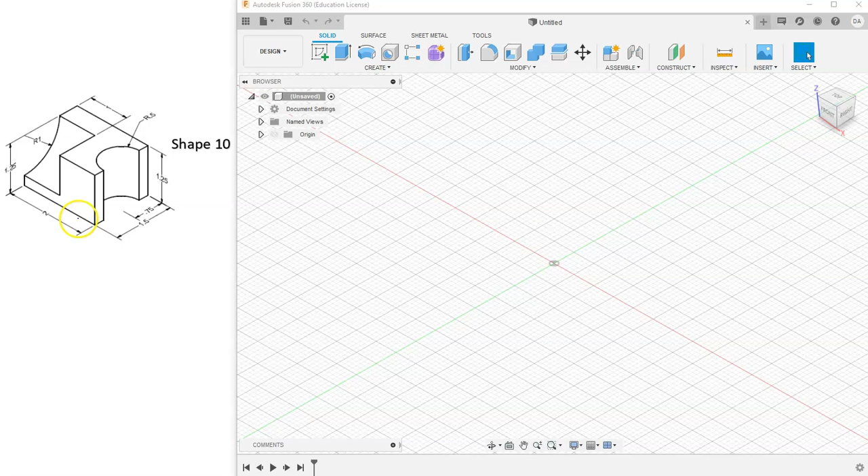And so let's start by just building a big rectangular prism. I'm going to create a new sketch, go to my front view, and this rectangular prism has a width of 2 inches and a height of 1.25 inches.

I'm going to grab my rectangle tool, click on my origin and drag, and type in my height first, 1.25. Then I'll hit tab on my keyboard and type in a width of 2 inches and hit enter, and I have a fully constrained rectangle.

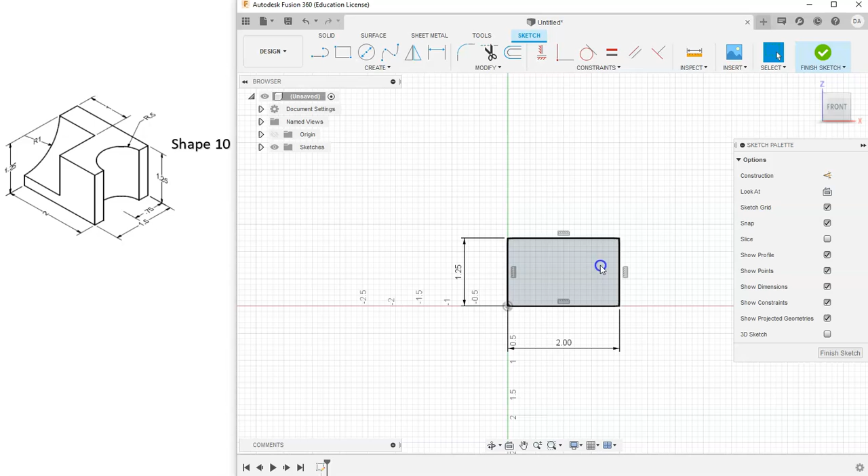I'm going to go to finish sketch and hit extrude, and I want this to extrude a depth of 1.5 inches. So let's type that in, 1.5, hit OK.

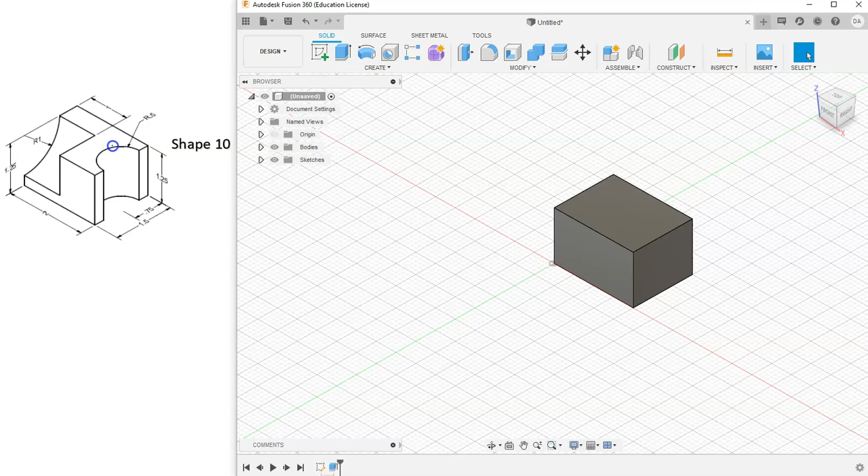And then we just need to cut out these two semicircles. So let's start with this half circle on this top face. I'll select my top face and go to new sketch, and let me zoom in so I can see what I'm doing. I'm going to start with my circle tool.

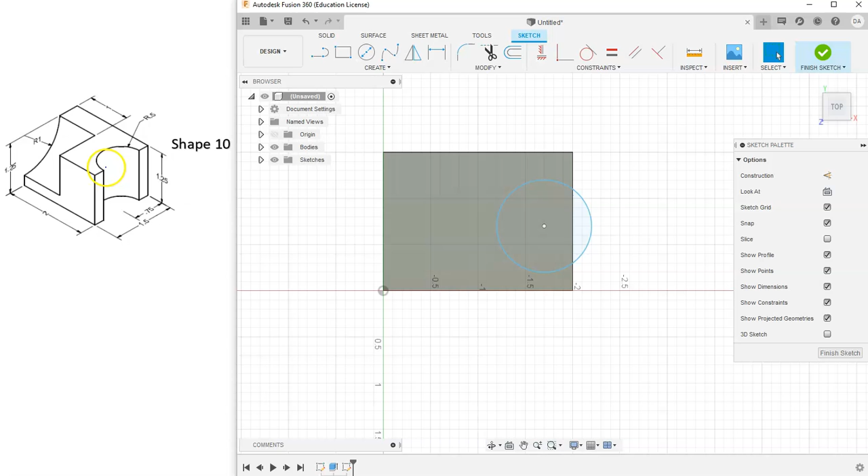I'm just going to draw a circle somewhere towards the right side of this shape. Right click and hit OK. Now this circle is centered on this edge, so we're going to take our coincident constraint and tell the center of our circle to be centered along this edge. Right click OK. So now this circle is stuck on this edge.

It can't move left or right, but I can move it up and down, and I can also change the size of this. I want to go to my home view so we can get a better look at this. And so we need to figure out those two dimensions. If I grab my dimension tool and select my circle, it'll give me a diameter of this circle.

If we grab our trim tool and we trim off this half of the circle that's sticking outside of our edge, now we only have a half circle.

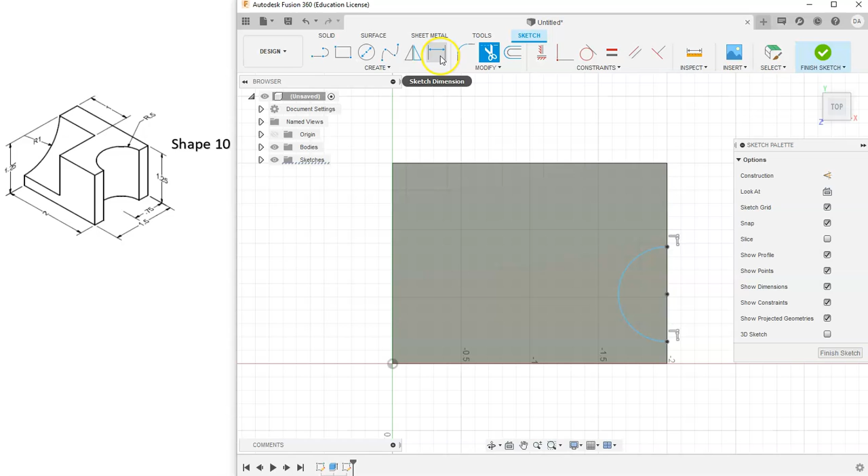Now if I grab my dimension tool and select this half circle, it'll automatically give me a radius. It no longer gives me a diameter for dimension. Whenever you dimension a half circle, it automatically measures the radius. Whenever you dimension a full circle, it automatically measures the diameter.

And what is our radius? Well, it's 0.5. Hit enter, right click, cancel, and now I can drag this half circle up and down.

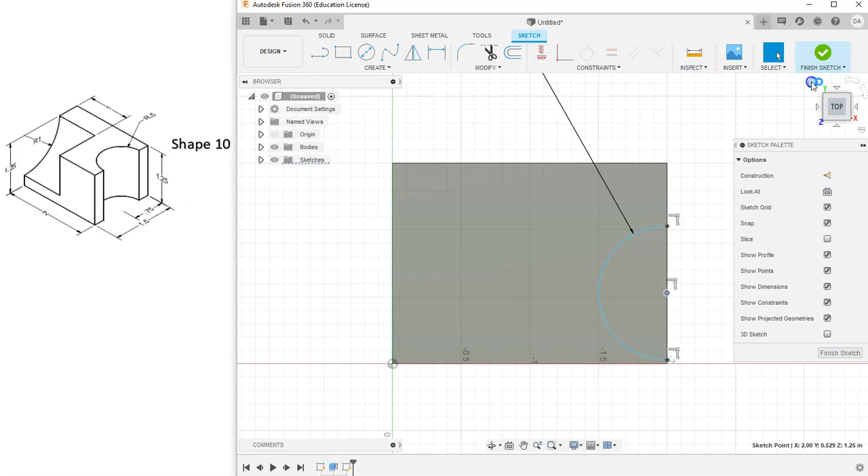What else do we know about this semicircle? Well, we know that the center of this semicircle is 0.75 away from this edge. So let's grab our dimension tool again. Let's click on the center of our semicircle to this edge over here, drag that out, and tell that to be 0.75, and hit OK.

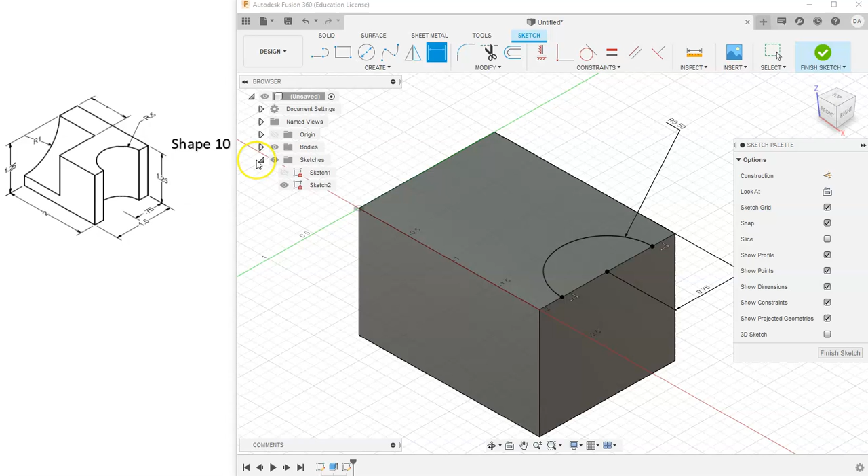And now we have a fully constrained sketch. I'm going to go ahead and finish and extrude, and I want to cut out this edge all the way through. Hit OK. And there we go—now we have this semicircle cut out of this edge.

What about this quarter circle over here? Well, this one can be a little bit tricky, especially since we've never done anything like this before. But this is not actually cut out of the side face, and it is not cut out of the top face. You can't really cut this shape out of either of those faces.

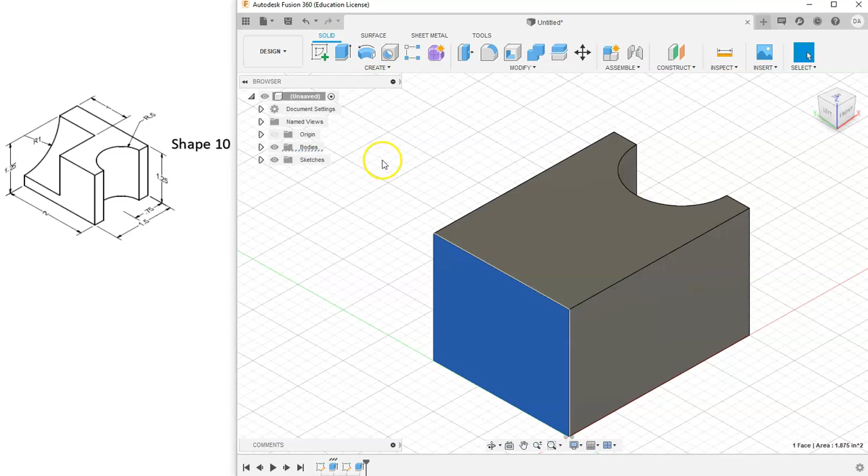In order to cut this semicircle out, we have to actually go around to the left side of our shape and start a new sketch over here. So let's create a sketch and grab our circle tool. I'm just going to draw it along this face. Right click and hit OK.

And if you look, this is clearly a quarter circle. I'm going to grab my coincident constraint and tell the center of my circle to be coincident with this top corner over here. If I go to my home view, this is what it'll look like.

Hopefully you can start to see it, but only a quarter of the circle—let me go over to the other side—only a quarter of my circle is inside my shape. The other 3/4 are outside in free space.

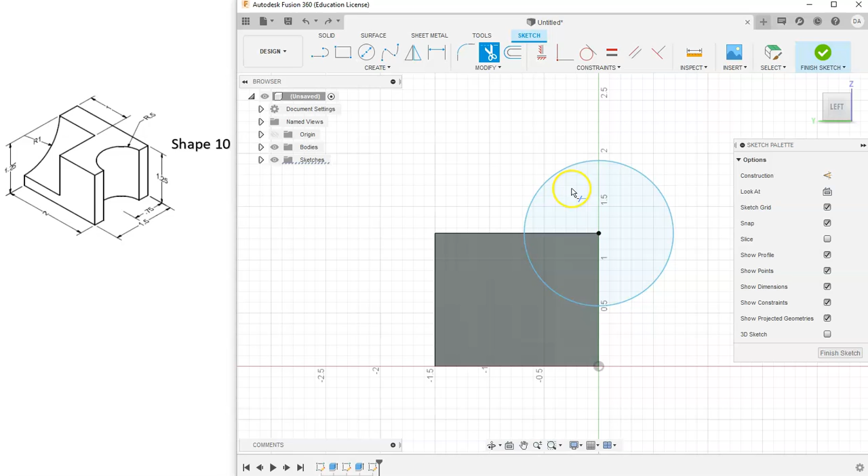Now that I've got it centered, I want to grab my trim tool and trim off that outside 3/4 of my circle. Right click and hit OK.

And then I want to grab my dimension tool and tell this semicircle to have a radius. You'll notice that it's measuring a radius because it is a semicircle, not a full circle. To have a radius of 1.

And hit enter. Now, you might be thinking to yourself, could I have dimensioned it before I made it a quarter circle, before I trimmed off that outer edge? And the answer is yes—you would have just had to double the radius to be a diameter of 2 inches instead. In the end, it would have been the same shape.

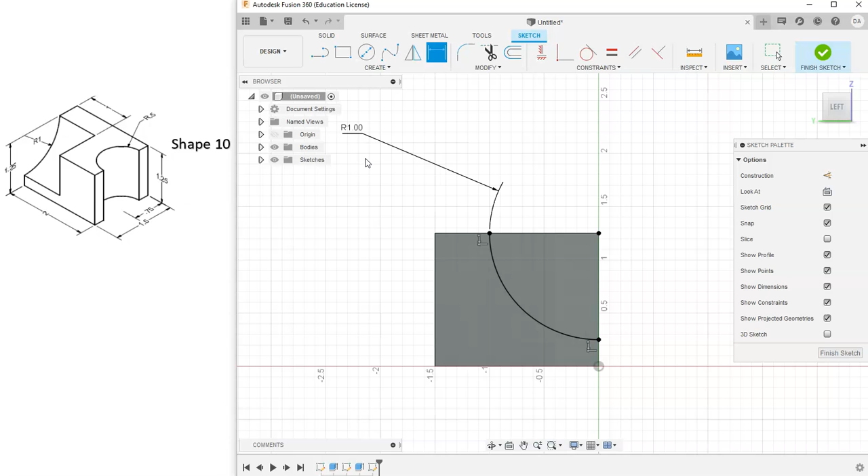But now we have a fully constrained sketch. I'm going to go to my home view and finish my sketch and hit extrude. You'll notice that I can't select that face. Let me go back over here to this other corner and select my shape and then drag it in. Now I can go back to my home view and do whatever I want to it.

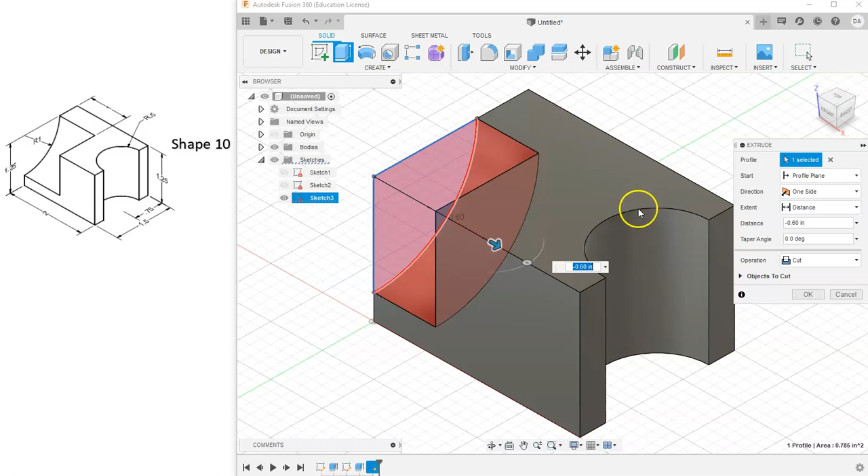And how far does it extrude in? Well, it extrudes in 1 inch, and we need to make sure we type in a -1 to make sure it extrudes the correct direction. And then hit OK. We are done with this shape.

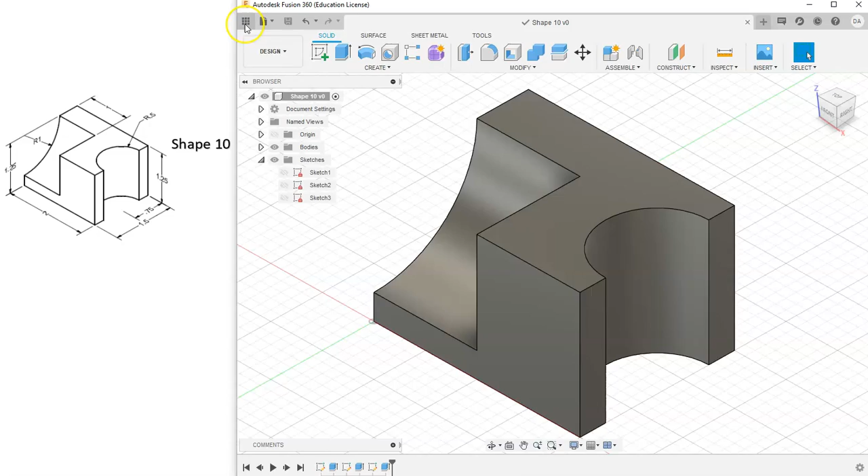Let's go ahead and save it as shape 10. Hit save. And then let's make sure it's saved in here. And there you have it.